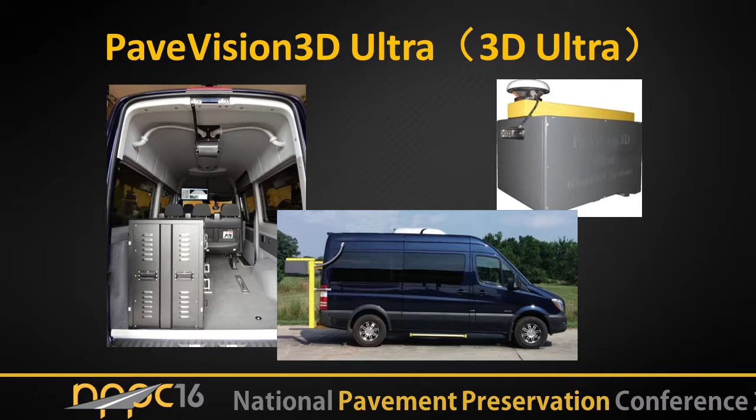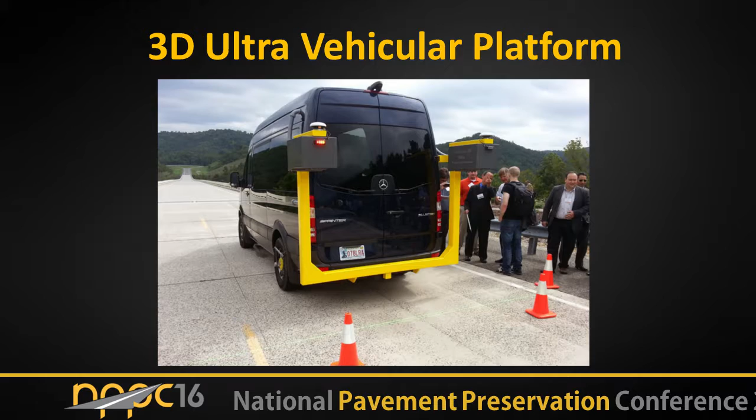So this was a shot that came out of the Smart Road in Virginia a few years ago. I think it was an RPUG meeting or Pavement Evaluation Conference. I'm showing several visuals. I hope the displays are good enough for you guys at least to understand the quality we are able to get.

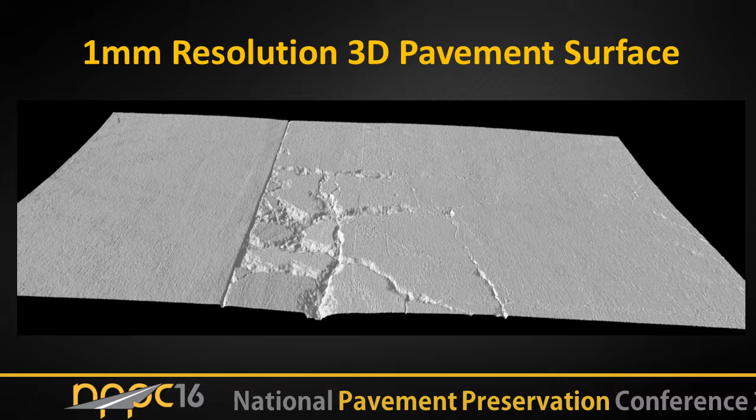This is a 3D surface, and those data sets I'm going to show you were collected about 4 years ago. So you can tell that the technology is leading regarding the quality of data. And I can say that even today, regarding the definition and quality of the data, we are unmatched in what we can do.

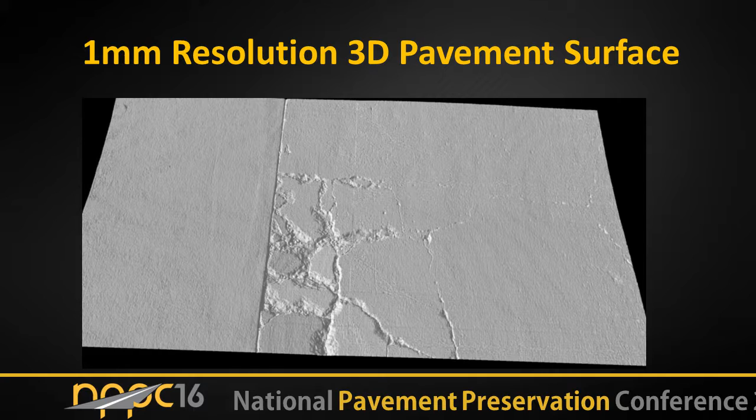For example, this data set was collected at 60 miles an hour, 100 kilometers per hour, at Interstate 35 north of Oklahoma City. This is a comprehensive data set. As you can see, we have the intensity data, we have the range data, that's the big swing of the 3D, we have right-of-way, we have profiling, etc.

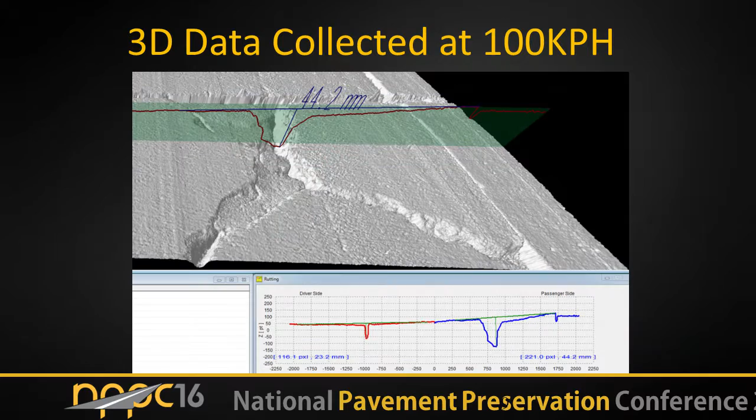A close-up of this particular data set, as you can see, this is the same data set collected at 60 miles an hour. And this is a full lane width, roughly 13.5 feet wide.

This is the zoom in of this particular deterioration at the corner of the concrete slab. You can almost see that something was done there. There's a circular pattern that was actually a drill, and that drill caused the deterioration of the corner. Subsequently, they filled it with asphalt materials at two different stages. The first stage was to fill the drill itself, and then later they filled it again.

So this is another close-up, captured at 60 miles an hour. We were very proud and shocked when we saw this data at 60 miles an hour when we came back from the field trip. So that's more like a demo image I show to people all the time.

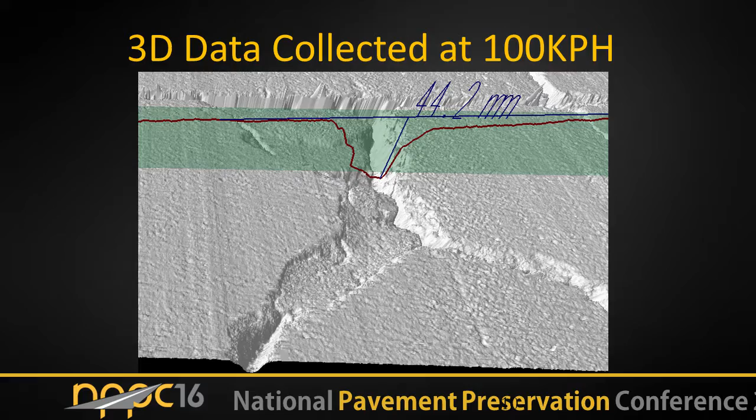So essentially we have a world-leading definition and resolution 3D data collection technology.

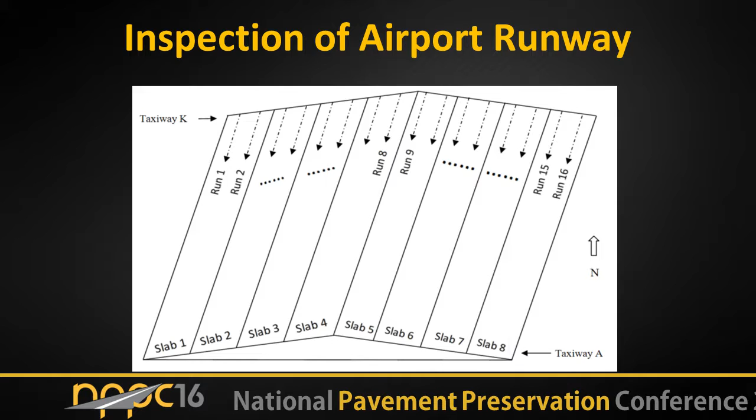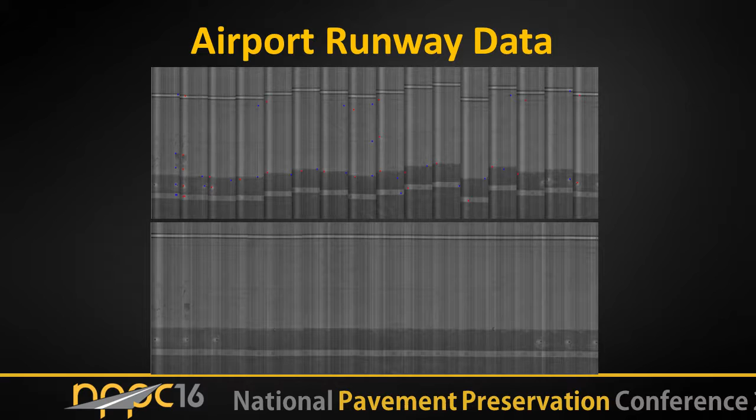From this new stitched data set of a virtual runway with geometry accuracy, we're able to use PCI analysis to determine the distresses from there. This process has been around for over 10 years, and we're working with FAA, the Tech Center in Atlantic City, on further improvements of the system. For instance, this is one of the deliveries we have to give to FAA through a research project, where we're able to establish the 3D surface of a runway and do PCI analysis from there.

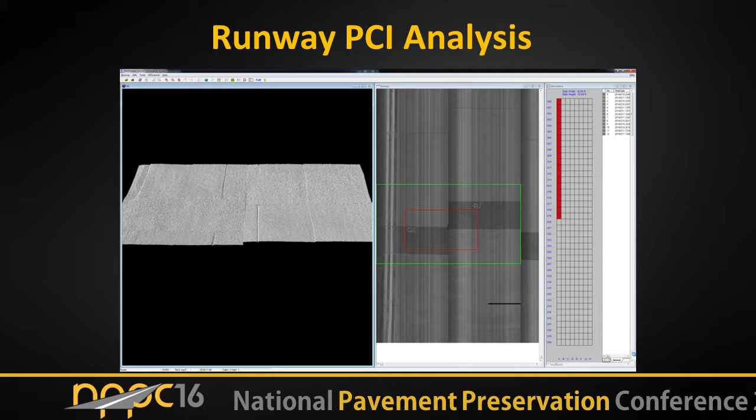Another example of our airfield work is groove evaluation. For those of us who have done work on airfield, or know something about airport pavement systems, all the airports in the US have grooves, okay?

We know that FAA has a documentation set called Advisory Circular, which is very similar to AASHTO guidelines or AASHTO standards. The big catch on the advisory circular is all the airports have to follow the AC in their design and management. They have a circular called AC 150/5320-12C, and this particular AC determines the groove evaluation methodology, essentially the groove depth, width, and spacing.

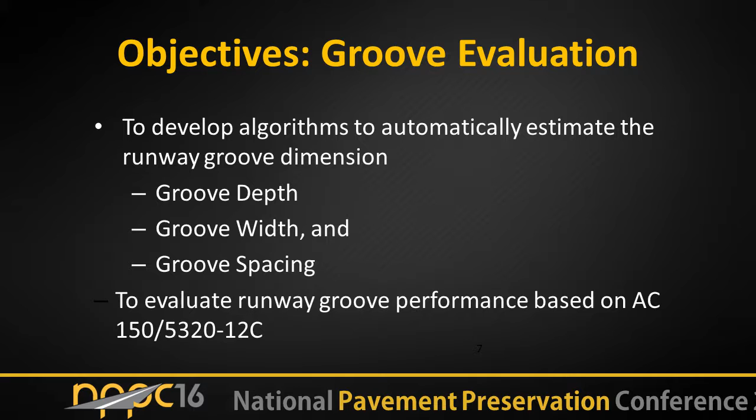Now a common conception is that we develop grooves on airfield pavements to improve friction or tire-pavement interaction. That's true to a large degree, but the number one objective of grooves on runways is not to directly address friction, it's to address hydroplaning so that water runoff can occur as rapidly as possible. The bottom line is runways cannot have water on the surface. That's the primary objective of grooves.

So grooving performance is becoming a very critical part of the pavement management system for runways. Now the dilemma was, even though FAA has an advisory circular to define the depth, width, and spacing of grooves, and that AC has been in place for probably more than a couple of decades, there has never been a technology to evaluate the performance of grooves after the runway has been put into operation.

At the beginning, with new construction, you can measure it using a ruler and whatever. But whenever the airport is in operation for 5, 10, or 20 years, it's very difficult to measure the performance of the grooves to see if they are still okay. The grooves have rubber accumulation, which is a big issue. The rubber of the tire actually gets caught up in the grooves and fills them up. The other thing is surface deterioration because of wear caused by the tire at very high PSI and speed.

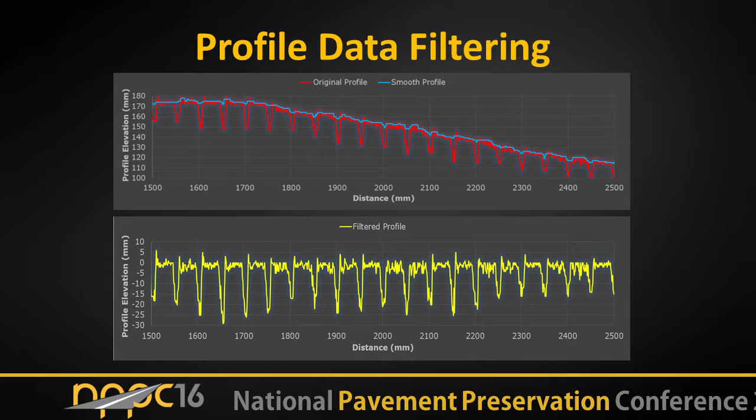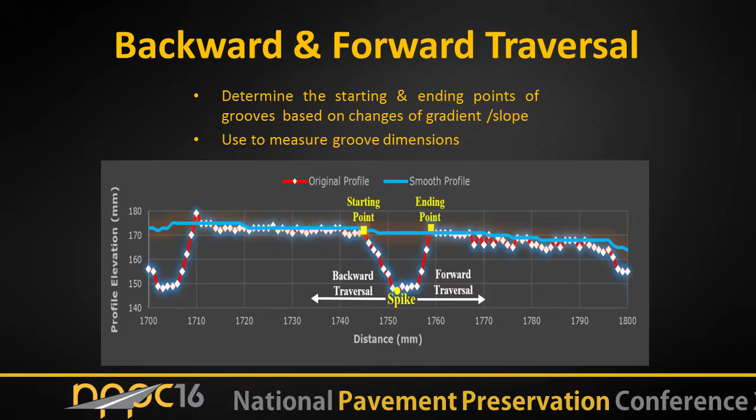As you can see, the top one is the raw data, the bottom one is the initial filtering. We use geometry contour algorithms, and then we're trying to do backward and forward traversal to determine where the grooves are, and then of course the depth and the spacing, and also the width of the grooves.

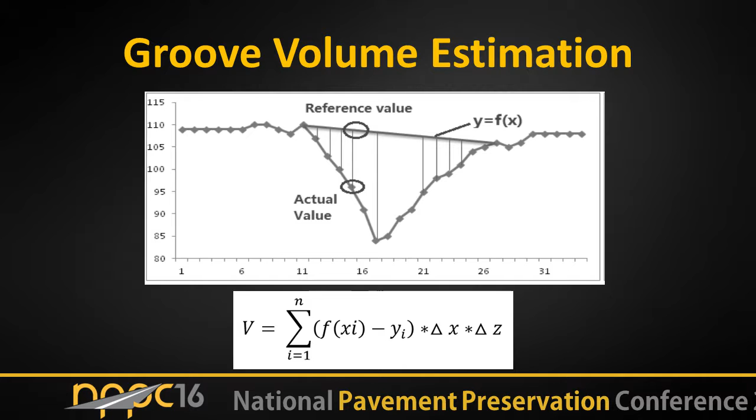In addition, since we are able to capture the pavement surface in 3D, we actually can calculate groove volume, and that has never been done before. We think it's an important parameter because the primary objective of grooves on the runway is to maximize water runoff rate, and the groove volume would play a critical role in that process.

For those of you who visited the Tech Center of FAA in Atlantic City, the pavement group has an indoor runway, roughly a quarter of the length but about half the width of a full runway, and they do all sorts of testing through construction cycles. They are doing construction cycle 7, and we'll do construction cycle 8 pretty soon. We actually went there to do all kinds of data collection and algorithm validation.

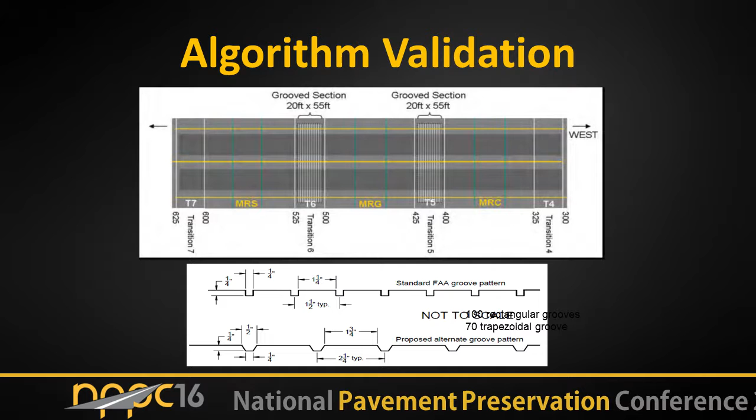This is part of the data we actually collected. As you can see, the grooves are captured in the transverse direction. We have a pretty high success rate—actually very, very high—90 plus, sometimes 99 plus percent, with all grooves identified correctly.

This is an example of the groove evaluation we conducted on the construction cycle at the FAA's indoor test track. So that concludes the first part of the presentation on our current work.

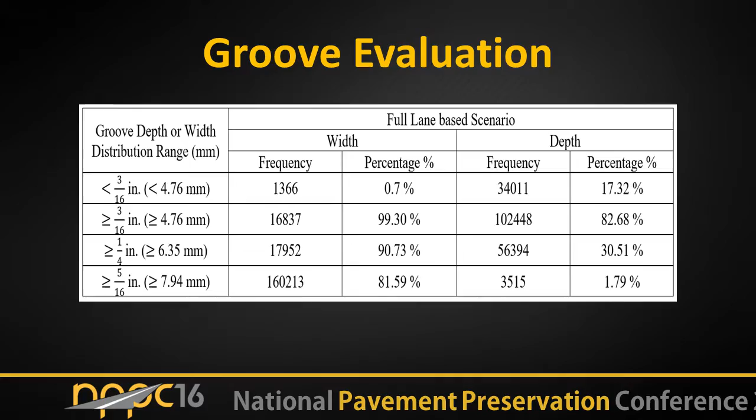The other thing I did not add here is that we are also doing tunnel and rail inspection with our technology in China. We already mounted our customized tunnel measurement system, and we are developing our high-speed rail system, highly customized with 7 sensors at 0.1 millimeter to 0.5 millimeter resolution across the entire rail track. That's something new we are doing, and we hope to have some results in papers and journals soon.

A little bit unfortunate because the US really does not have a whole lot of tunnels, and we have limited rail operation at very high standards. In the northeast corner we have some, but other places heavy haul is big, while traditional rail line is not of high standards.

Without further ado, I'm coming to part 2 of the new developments we have. The first one I would like to talk about with actual data. We've been doing this for a couple years, but this is the first time we've been showing the data. We call it the WIS inertial module, for longitudinal profiling. We are very happy that we achieved a milestone with our 3D sensors and integrated inertial module.

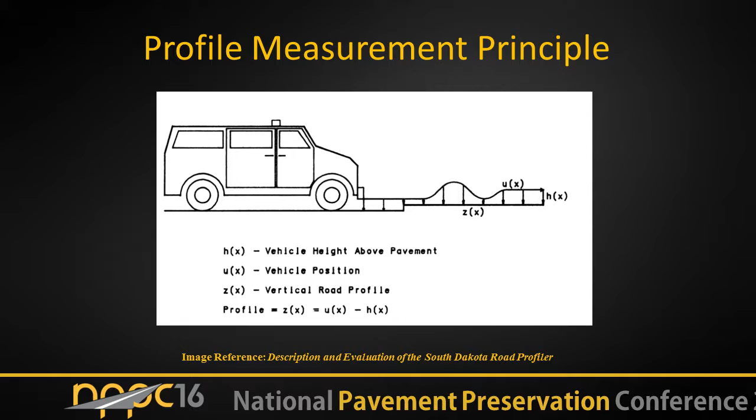We, of course, use the South Dakota road profiler principle. Many vendors today rely on that principle, which is a very robust approach. I believe the person who invented this device is still working today—he's the head of the South Dakota DOT's research program, David, if you know him. I don't think he's here today. But that was a fabulous design at that time, and we all refer to it as the South Dakota profiler, the term referring to this particular invention.

What we did is we ran 3 tests. Each test we ran more than 10 passes, okay? Test section number 1 is about 1,100 feet, and we ran it at 30 miles per hour. The next section is about the same length, and we ran it at 40 miles an hour. The third one is 1,700 feet, and we ran it at 60 miles an hour.

Now, those test sections are not controlled sites, so we were very limited regarding how we could maneuver. It all depended on the driver who really had to control the vehicle. So every pass we did, we had to run the same location. So the data you're going to see, even though we had no control of the test section regarding traffic—those are live streets or highways with other vehicles running around—we were still able to achieve what we can show you today.

This first test section was 30 miles an hour. We ran 12 passes, okay, same day. The repeatability of 3D data, this is equivalent to the traditional Selcom height data, okay? But the height data information in this particular case came from our 3D sensors. So those are the raw 12 passes—we did not discard any path data, okay? We just did 12 passes. We did the statistics with ProVal, and we came up with 94 on the left side and also 94 on the right side for repeatability of 3D height, okay?

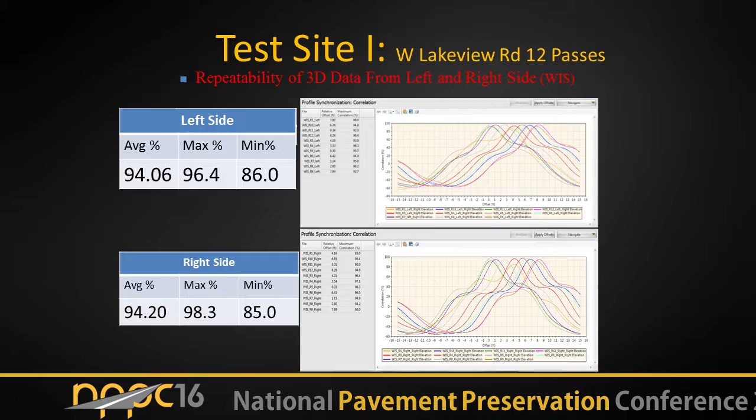This is a very critical parameter in the TTI certification process. Now, by removing the worst 2 and keeping the best 10 passes, the data improved 1%, okay, which is good. And that's exactly what TTI certification does—they allow you to collect well over 10 passes of data, and then you keep the 10 best for the certification. We're able to achieve 95%.

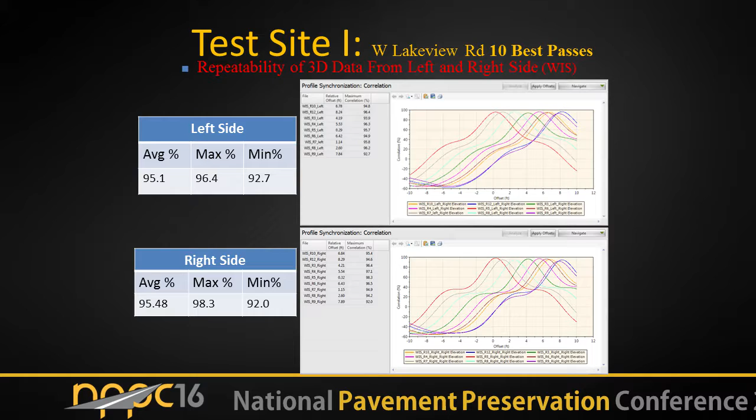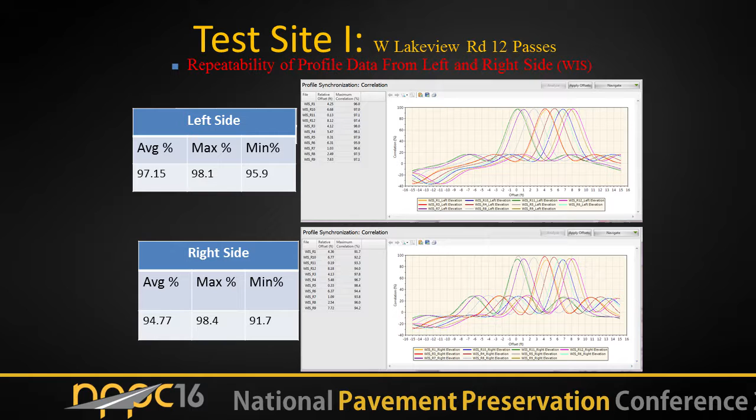All right, so I'm going to run it a bit faster. Darren just told me that I've got probably 9 minutes left.

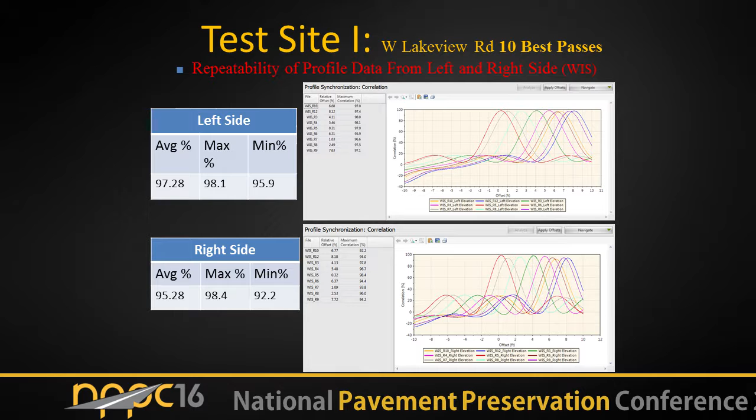This is still on test site 1, repeatability of profile data from the left and also right side, okay? 97, 95, and repeatability data from the left side.

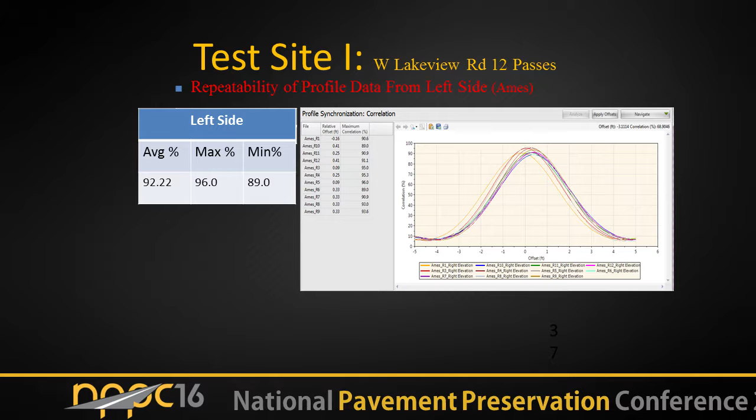Now, this is Ames. Ames is, we use the TTI certified device. We actually physically certified our device from Ames. We purchased the Ames device 4 or 5 years ago, and the Ames achieved 92% repeatability of the profile data. And for Ames from the left side is 92% as well.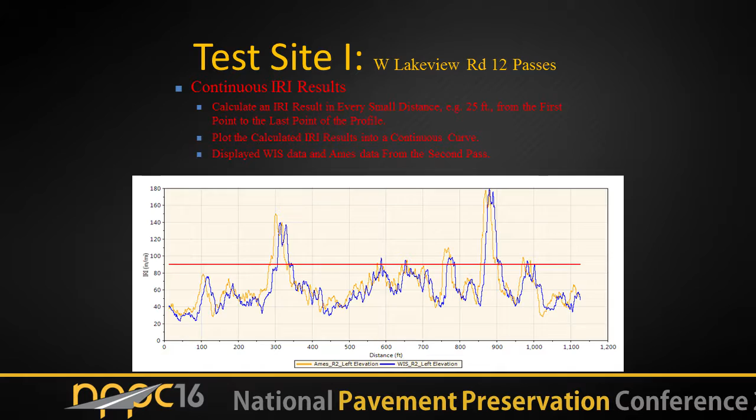We match almost exactly the certified Ames device, so I'm not going to read all the numbers. Test number 2 is 40 miles an hour, about the same length. Repeatability is high, about 94% on both sides. If we take the 10 best passes, we achieve 96 and 97 repeatability, which is very, very high. And repeatability of profile data is over 90%.

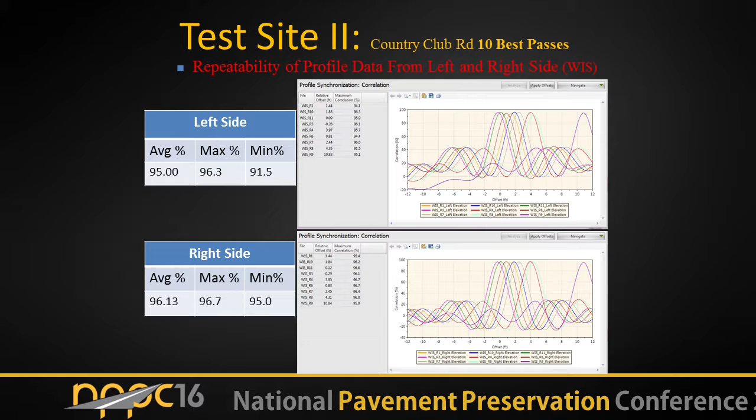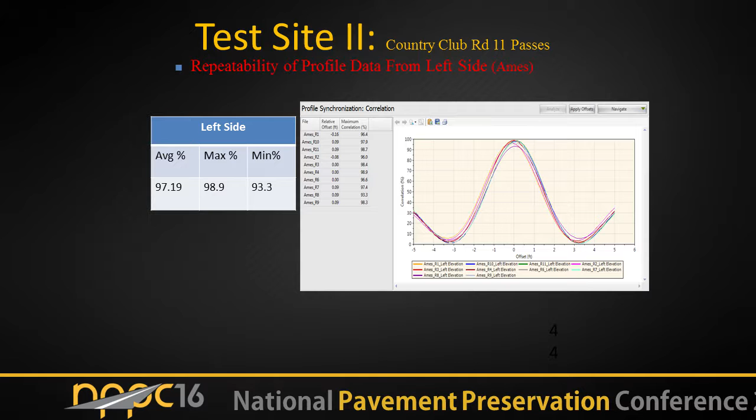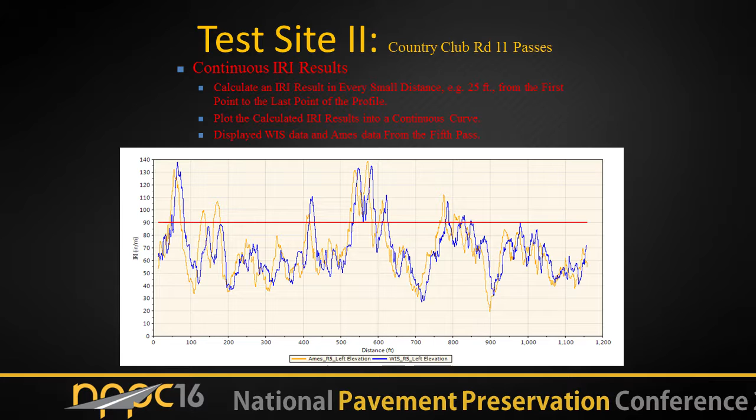If we do the 10 best, we do over 95%, and the Ames data is 97. So we are matching the Ames data real well on the repeatability of the profile data, and this is Ames 97, which is very good. The IRI data sets, we shifted a little bit to show the comparison, and they match almost exactly as well, the Ames data and our own WIS data.

And then the IRI results match real well. So we are pretty confident that our system is able to pass certification, and we have some more work to do to get this used by users in the field, and we are planning to do that pretty soon with our several current users.

The last thing I'm going to talk about is called deep learning, and we all know that finding cracking is not easy. I was very naive in my early years doing this development - I thought in the late 90s, give me 5 years, I'll get it done. 20 years later, we're still making gradual progress, not really solving the problem right this moment. If somebody tells you that they got cracking detection at 90% or 95%, I agree that they probably worked on some sample images, but you cannot achieve that level at network level, fully automated.

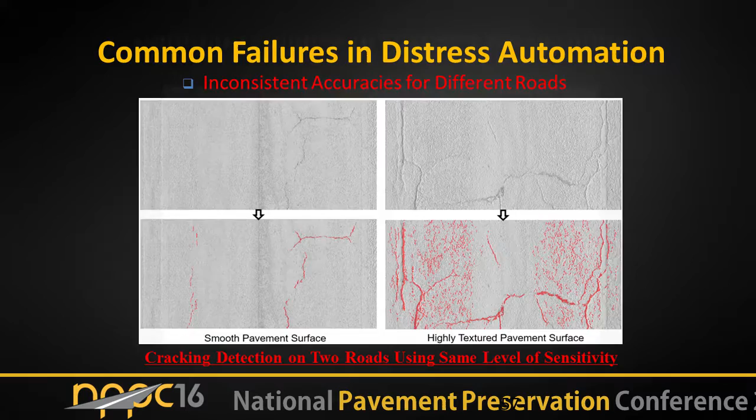Here's some examples, some bad examples I'm giving to you, of what our software did with certain images. For instance, we got a lot of noise identified as cracks in this particular case. In this case, if you can see the details, we caught a lot of cracks, but not all of them. And in another case with grooved pavements, we caught all the cracks, but we got one groove that's classified as a crack. So there's a problem there.

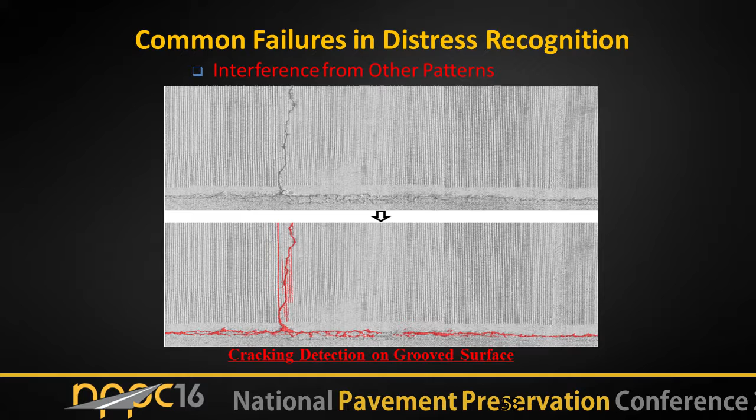And this kind of error occurs very, very frequently, and manual editing is very, very expensive today. All the technology integrators or suppliers have these issues - it's not just our issue, it's industry-wide.

So why do we want to do deep learning? I played with neural networks in the 90s as a young researcher, and I did not make a whole lot of progress other than playing with some simple algorithms. They work well, but mostly they did not work for our applications. Early this year, you guys heard of Google using a machine called AlphaGo to beat a human in playing Go, and it's amazing what they did. I don't want to go too deep into that - I could spend 3 or 4 minutes just talking about it.

It's just amazing. When I found out, I asked my postdoc, I said, Alan, can you figure out what's going on here with this deep learning, the neural nets? He came back and essentially told me, he said, Dr. Wang, 10 years ago, exactly in 2006, there was a revolutionary paper published by a professor from University of Toronto that changed the entire landscape of artificial intelligence. So in the last 10 years, there's literally been a lot of work done, particularly by industry - people like Google, and now Facebook and Uber.

Each organization has a couple hundred people, and they do nothing but artificial intelligence for deep learning. Deep learning is nothing but a very high number of neurons and layers interconnected like a human being, and they're trying to teach that system to learn and to do things for us.

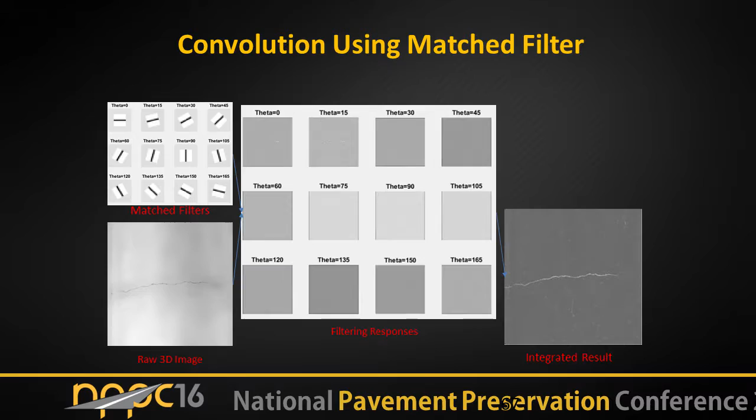I'm close to the time, so I'll go to my last few slides. It's a very difficult task, not easy, but first we build image libraries. We have 10,000 image libraries today. Those libraries are essentially the raw image and then the processed image.

The processed images are all double-checked by humans for accuracy. A typical example is that we have to feed sample images, literally in the thousands, both flexible and concrete pavements, into the learning system. It's a very, very challenging task, but we look forward to providing further updates later this year and every year from now on.